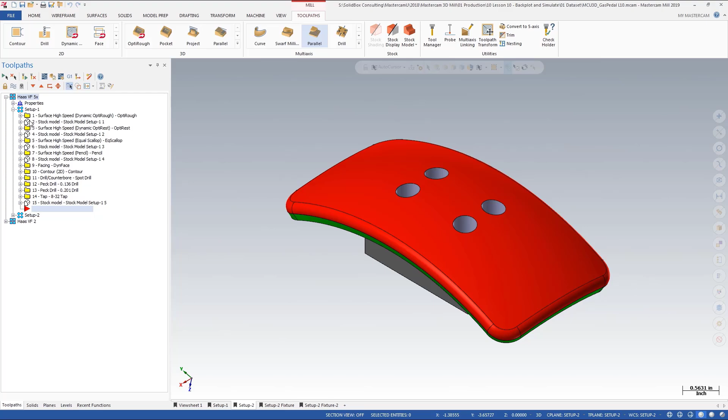When we start to talk about verifying these, we've already created a lot of stock models so that we could take a look at the progress through the toolpaths. We've also created a stock model at the very end of Setup 1. If we take a look at Setup 2, we start off with operation number 16, which is our OptiRough.

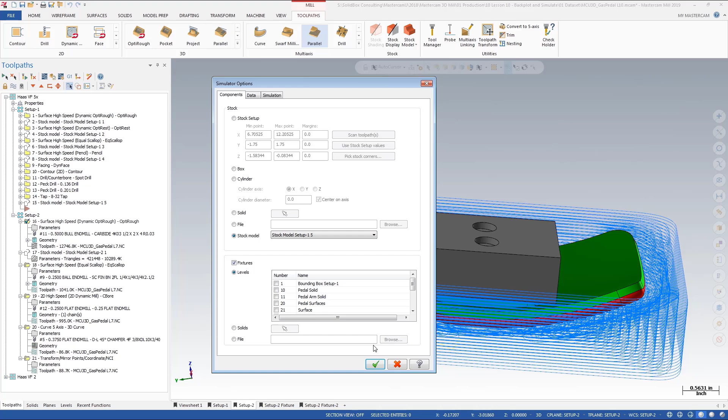Now in order to verify this, we're going to take a look at going into the simulator options, and we want to start with a stock model. In this case, we're going to start with stock model Setup 1, 5, and we're going to say OK.

We then are going to keep Setup 2 operation 16 selected and go into our Verify Selected Operations. As we open up this, it's going to bring in any fixtures that we've dictated we want to use, as well as the stock model as our starting point.

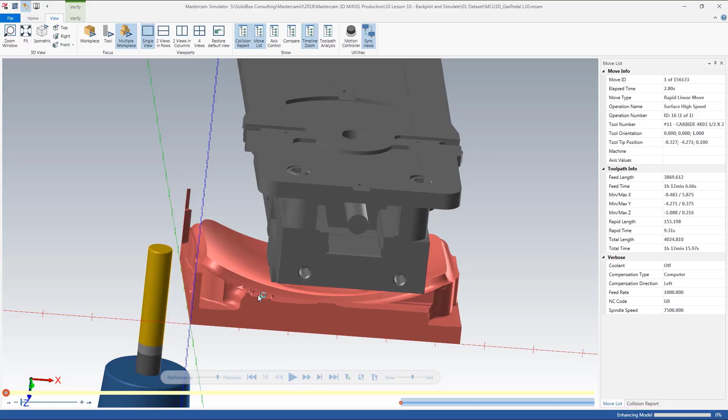This is especially important when you are flipping parts over and machining them from the other side. As we rotate this around, you can see that the current vise as well as our design fixture are inside of this file, and the stock model is our starting point because the underside has already been machined.

As we play through this, we can take a look at cutting the part as if it's already been flipped over physically. Again, this is a great way for us to start verifying our operations, make sure that we're not doing things like leaving a large chunk of stock to get flung off as we're machining, and also just to make sure that we're not gouging a vise or a fixture or having any other additional issues.

As you play through the verification, you have several different options that we can look at. We can take a look at the move ID and elapsed time, the operation name and type, as well as things like the length that the tool has been feeding, the amount of time it takes for it to feed to complete this operation, as well as the amount of time that's spent doing things like rapid movements.

We also have a tab to check for collisions. Now ideally you want to see no collisions here, but if you have a collision, it might help you identify exactly which toolpath and a specific ID of when that happened.

Along the top section, we also have various options. You'll notice that highlighted in green right now we have the verify option, and we have collision checking turned on. We can also do things like change the color loop by operation so that it removes material in multiple operations and changes the color of the stock.

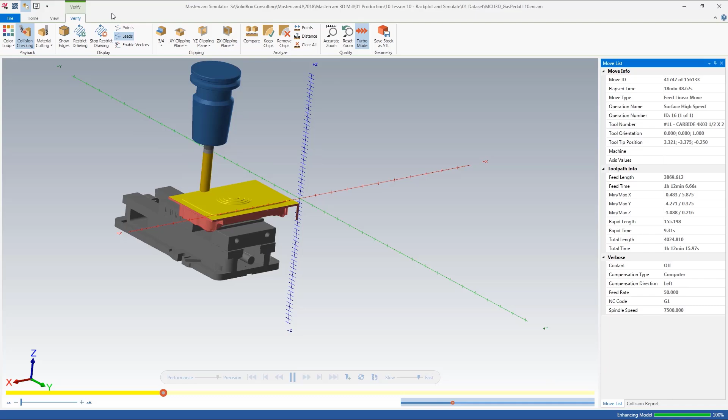Right now everything's set to yellow regardless of any changes in operations, and in this specific case we're only looking at one toolpath. We can change the display by doing things like showing where the tool has been or where it's heading.

We can also do things like make clipping planes and see inside of the part to make sure that the tool is getting into all the areas we need.

There are lots of options inside of the Verify tab that you can look at, and they will do things like, for example, keep chips. So this one will allow you to keep the stock on the screen.

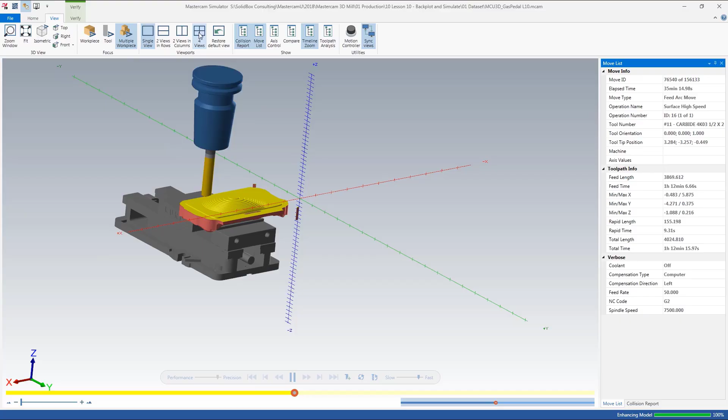Let's take a look at some of the view options that we have. Inside of here, we can change the way that we're viewing the part, such as doing 2 views in a row, 4 views, 2 views in a column, or restoring our default view. We can also dictate what we want to show on the right-hand side.

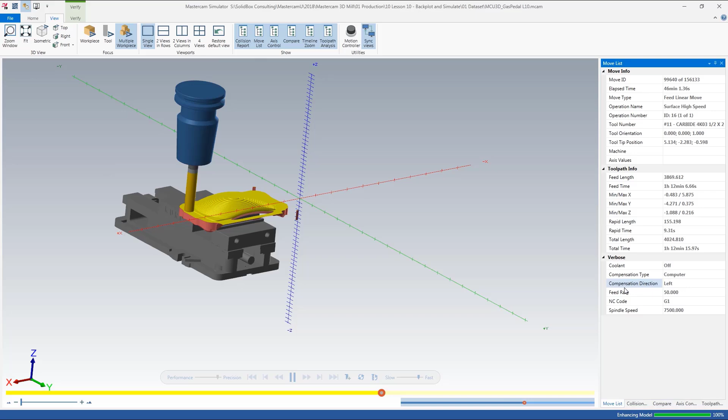For example, if we want to turn on a Compare tab, an Axis Control tab, Timeline, as well as Toolpath Analysis, these various options allow us to change the way that we're seeing the results of our operations. On the Home tab, we can also change other things, such as showing the original workpiece.

We can make the stock partially transparent, or bring it back solid to make sure it's all being removed. We can even turn on and off things like the toolpath, and dictate whether we want to show the holder, the shank, the shoulder, or turn the tool off completely and just watch the material being removed. It's usually a good idea to leave these on, at least initially, to make sure we don't have any visual issues with where the tool is moving.

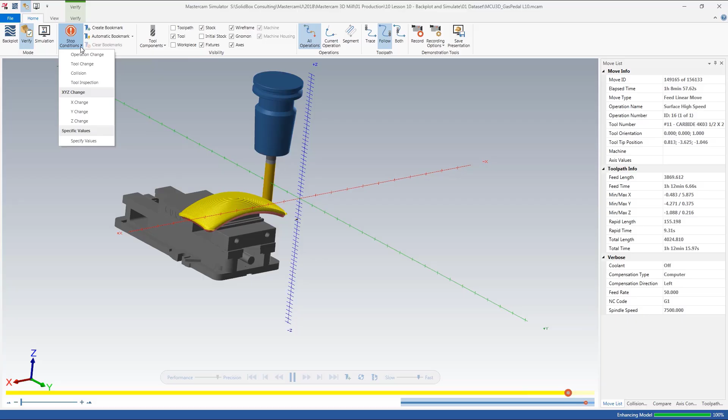We have a playback section where we can dictate what stop conditions we might want. For example, if we want to always stop on an operation change, a tool change, or a collision, we can turn these options on and it'll pause the program or playback, requiring us to manually OK it. This gives us a great interactive feature that allows us to pause the program while running and see exactly where collisions are happening.

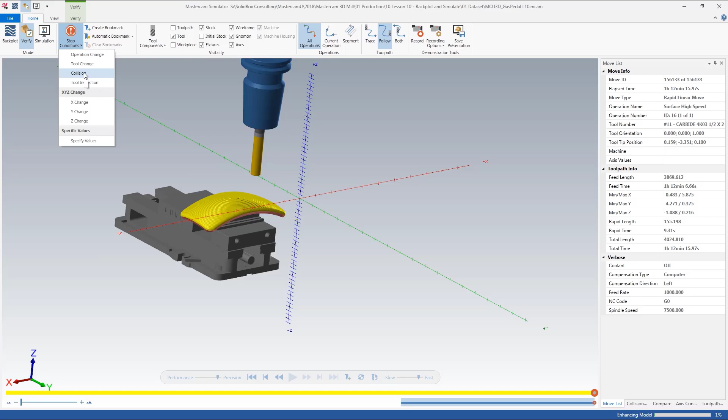So again, you can see that with the initial setup, this is a great way for us to validate what we're doing in terms of roughing and finishing operations, especially once we flip a part over.

If we go back into our program at any point, we can modify exactly where we want the starting point of the verify to be. For example, we've already machined operation 16 based on the stock model from setup 1. Now if we go back into our options, we can change the stock model we want to use to Setup 2-1.

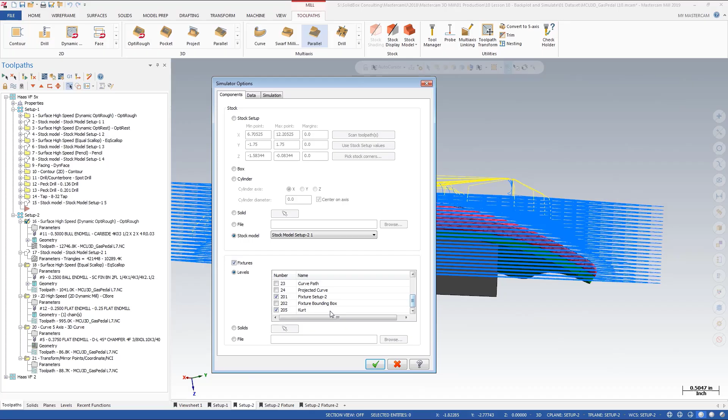We can also change what fixtures we want to display. For example, if we don't want to display the vise, we can turn that off and simply show the fixture. So now, to make any verifications, we want to do this by selecting all the operations and then playing back through everything after that initial stock model.

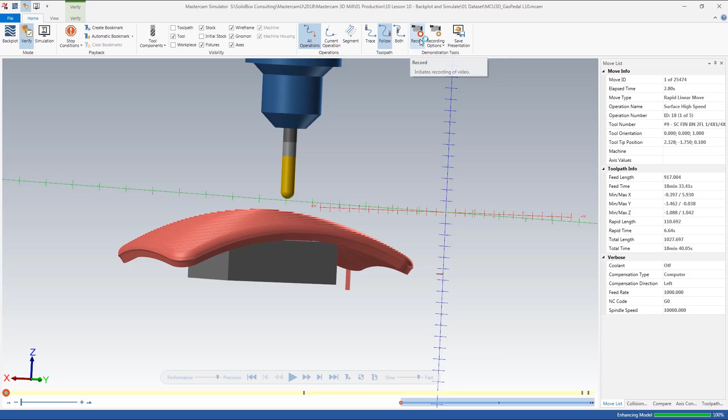On the Home tab inside the Mastercam simulator, we also have some options to record our view. If you want to record the screen and play it back, you can do this directly inside the Mastercam simulator. Let's go ahead and play through these toolpaths to make sure the final output of our part is going to be acceptable.

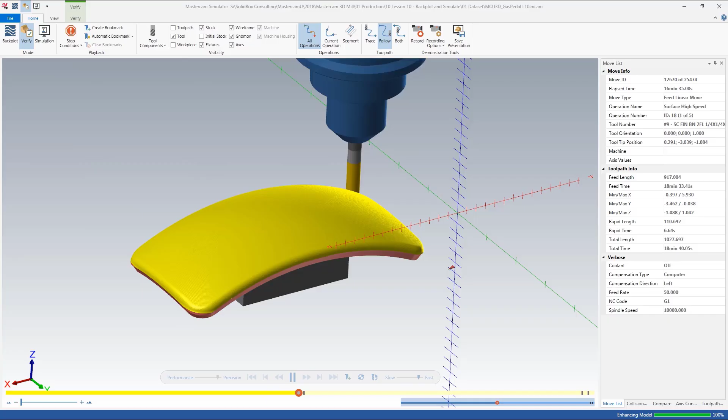So now we can see at the end of our part that everything's been machined properly. There's a small chip floating off in space here, but it's small enough that it won't cause a problem when we're manufacturing.

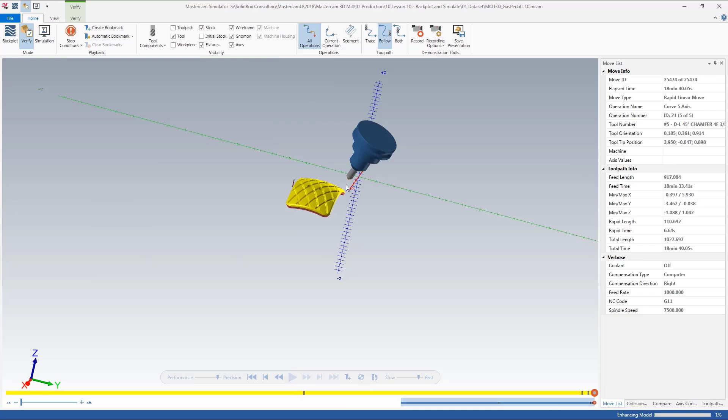I also want to note that while we're cutting these multi-axis toolpaths, the tool itself actually angles away from the part. We'll explore this more later when we use the Mastercam simulator with an actual machine. But for now, just understand that inside this Mastercam simulator, when verifying, the stock stays fixed and the tool moves.

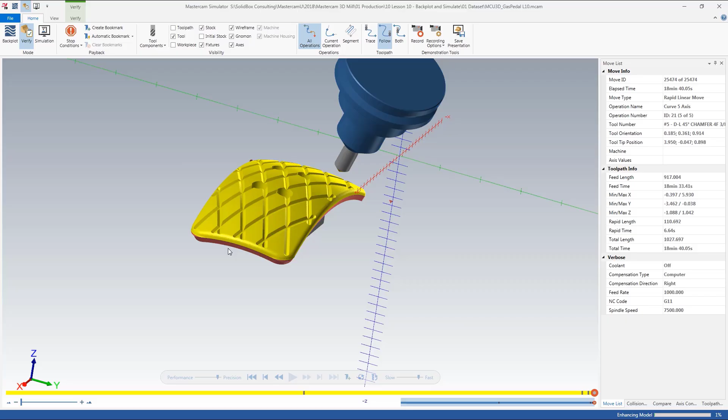The last thing I want to mention inside the Mastercam simulator for Verify is on the Verify tab, at the very right hand side, we have Save Stock as STL. We have the ability to save the stock out after it's been machined in the Mastercam simulator as an STL file. This STL file can be used as initial stock in another program, whether you need to flip it over again or send it to another machine, or it can be exported for other reasons.

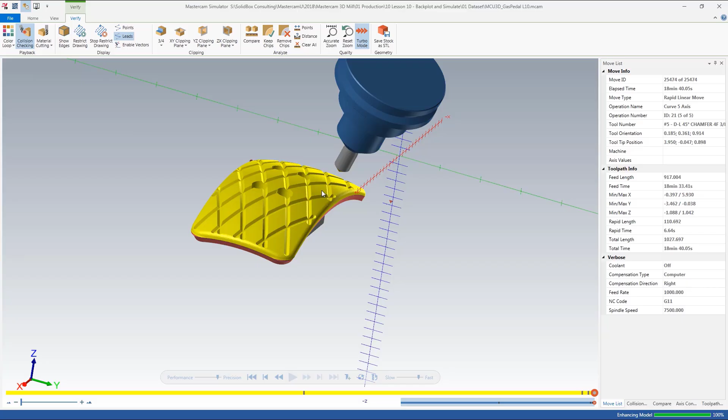So just keep in mind that there are various options inside the Mastercam simulator that can be very helpful to you in your machining process. For right now, let's make sure we save our file so we can move on to the next step.